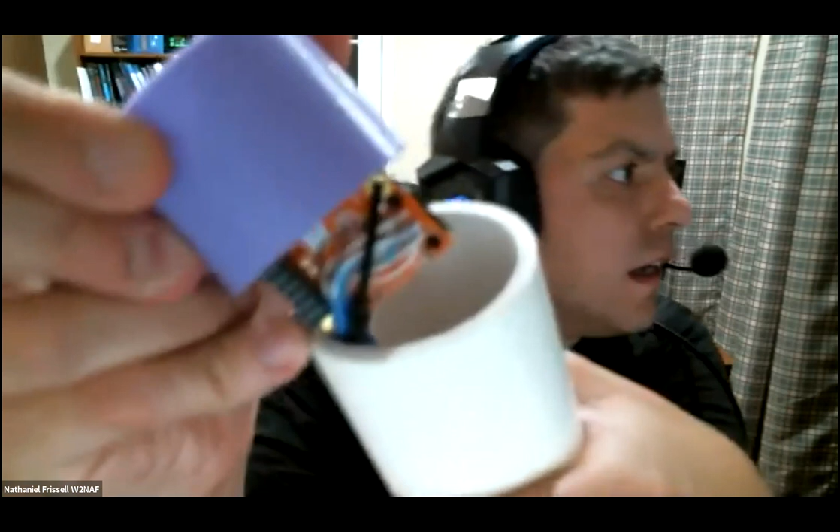So we're not using the Ethernet or RJ45 connector there, since it's not actually Ethernet. And then when we put the RJ45 connectors on there, we should use shielded connectors. Is that right? Correct, correct. Okay, yes. And what you might want to consider, Nathaniel, is not putting that down at the very bottom of the pipe. Keep it up a couple inches.

That gives you some tolerance of some water intrusion before it fries the board. Okay, yeah, although I have not had a problem with water with either of my sets for over 2 years now, or a year and a half at any rate. And if you seal it well with RTV, you'll be fine.

Okay, what was that about shielded connectors? Pardon me? What was that about shielded connectors? The bulkhead connector is female to female shielded. Oh, okay, so it carries the shield all the way through to the board. And I noticed that he also used a strain relief on that after they soldered the wires. There's a tie wrap as a strain relief at the bottom of the board, which is good. Yeah, oh, down at the other - we're going to have to, as long as the shields are well away from the magnetometer, because yep, shielded Ethernet connectors are magnetic.

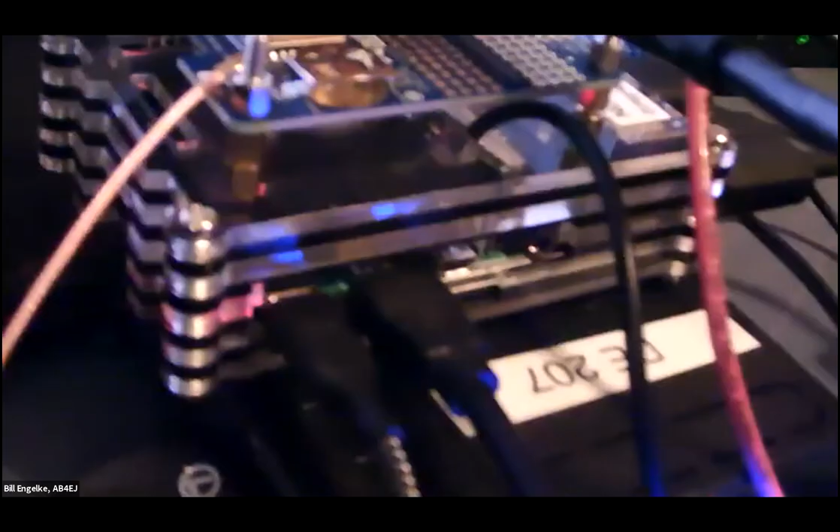All right, I'm showing my screen. You can see the bottom is the grape as it came from John, and then I've got one riser that comes up out of the grape, and plugged into that is the GPS unit I use for getting location and timing information, and on top of that is a magnetometer board.

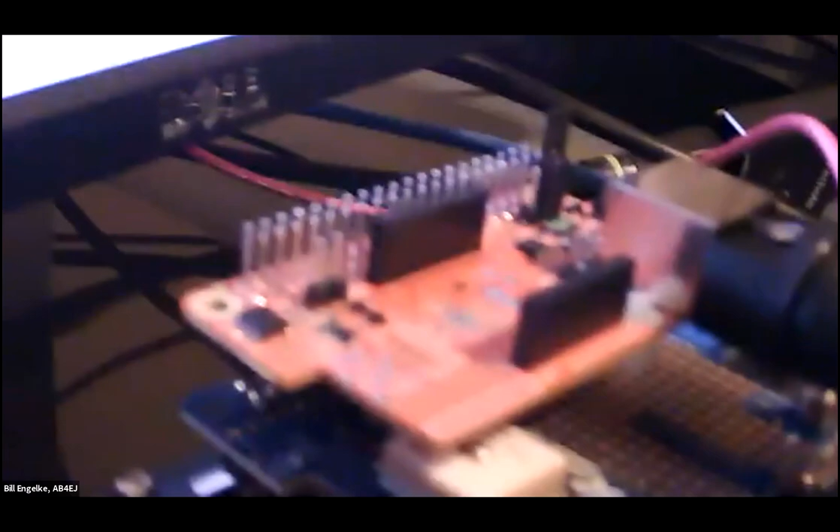Did you need a spacer to do that? No, not really. It's not ideal to have a PC board over the GPS antenna. Well, the antenna is outside - see that cable there? Okay, well you've got an antenna on there, but you're not using it, I take it. Yeah, usually that disables when you put on an external antenna. That makes more sense. I wouldn't be able to pick up a signal - I'm in the basement here. I have to have an external antenna to be able to get a GPS signal. So I just saw the antenna.

So the base unit that you call the grape is actually a Raspberry Pi and the grape and the power supply, right? Yeah, well, there's a Raspberry Pi, and this is, I guess, what you would call the grape. It's the Leo Bodnar and the little board that was built by John.

Right, but that's all in a stack, and then that goes to a USB extender so that I have everything - you've got to plug in your mouse and keyboard and your external hard drive, and there's no clearance to do that unless you use an external USB extender box to go into.

Okay, but stop right there - that stack you're showing right now, up to the upper left there, that stack. There's a stack of boards underneath your GPS, right? What is that? That's kind of deceptive, what that is. That's just the way the box, the chassis, or rather the case that came from Case Western Reserve is. It looks like a stack, but it's just a case.

And what's in it, just the Raspberry Pi? The Raspberry Pi, and I put an extender in to bring the GPIO out of the case. So you have the Raspberry Pi inside the case, an extender that extends it outside the case, and on top of that the grape board? Well no, the grape board is down here, it's separate. Okay, so on top of that you put the GPS, and then on top of that the magnetometer base. Yes, everything works like a champ, worked first time, no problems at all.

But when we get a Grape 2, isn't it going to go between the Raspberry Pi and the GPS unit? I'm not familiar with the Grape 2 design, but if it's going to plug into the GPIO header of the Raspberry Pi, I guess it would go in between. Yeah, that's what I think John has the intent for it to do. So it would still work the same way, you just have an extra board in your stack. Right, you can stack them up as high as you want, I guess.

Hey Bill, it looks like that extender - is that a homebrew extender board with a vector board? The board below the Pi looks like vector board and perf board. Oh well, it's just the lighting isn't very good here. It's just an extender unit that I bought from Digikey or Mouser or somewhere. Okay, it looked like it was made of perf board, the vector perf board. No, it's probably because I don't have very good lighting, it's very hard to see this.

And I've got some other things bolted down to the desk here, I can't move it back. But no, between the Raspberry Pi and the GPS is just one of those 40-pin extenders. Oh okay, a long pin header you mean? Yeah, I guess that's what you would call it.

So what is the thing that looks like perf board? Is that the board the GPS mounts on? Yeah, the perf board-looking thing is the GPS board. It's an Adafruit GPS, I don't know, $40 or something, and it gives you GPS. Okay, and that has the holes that look like perf board on the right hand side. Oh yeah, that's just part of it, it's the way it comes from Adafruit. Okay, so that's a prototyping section - you can add more stuff to it if you wish. Yeah, all right, got it.

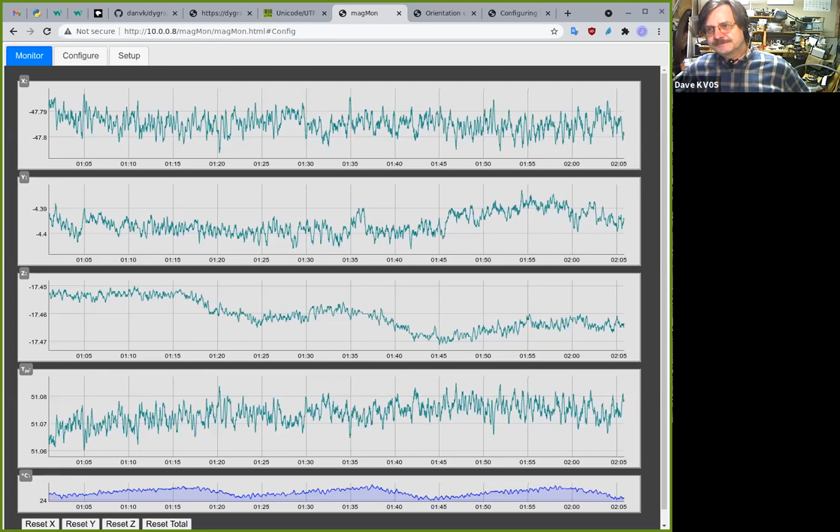Can you see that? Yes. Okay, well that is actually running, should be live. I see it move. And you can pan in.

I haven't really got it full pan. This at the bottom is temperature. It's actually X, Y, Z, and the totalized thing. And this is all running from a unit that's sitting on the desk across the room, and that bears absolutely no relationship to the real magnetic fields around here.

But you're reading it off of a real board, right? It's just that it's inside. And this also at the same time is able to push logs to the archive up on the server, it saves, but it also, this is actually a WebSockets interface that's served up by the device. It just serves up the page, and then it communicates by WebSockets.

So this data gets plotted, but it can be anywhere. The way it's set up right now, anywhere on my local net, on the subnet that I use behind my firewall. You could push it out beyond, but I would suggest that people don't.

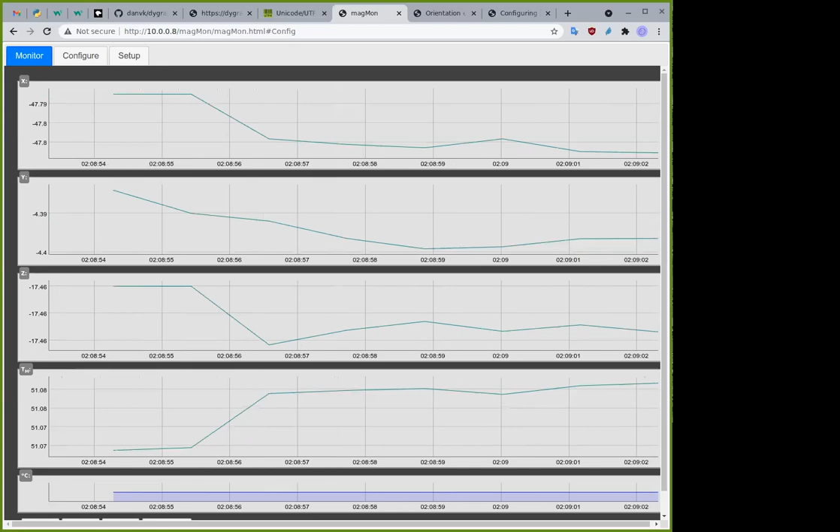I can actually refresh the whole thing, and you should be able to see it pulling in. I haven't figured out exactly the presentation here, but you have control over the time period that it displays. Is it from the beginning? Yes, I do. Well, this itself doesn't record anything.

So it's really from the moment you reset it. But there are a lot of questions I've had. I've been thinking about what this doesn't read, the logs or log data or anything. And I'm concerned how much I want to pump into this interface. I don't know, as usual with web stuff, you don't always know what's going on inside the black boxes.

Yes, it is. It'd be nice if you could just tell it to display the last hour, display the last day or something. And when you restart it, it would just start from the right-hand edge and fill in. I plan to do that.

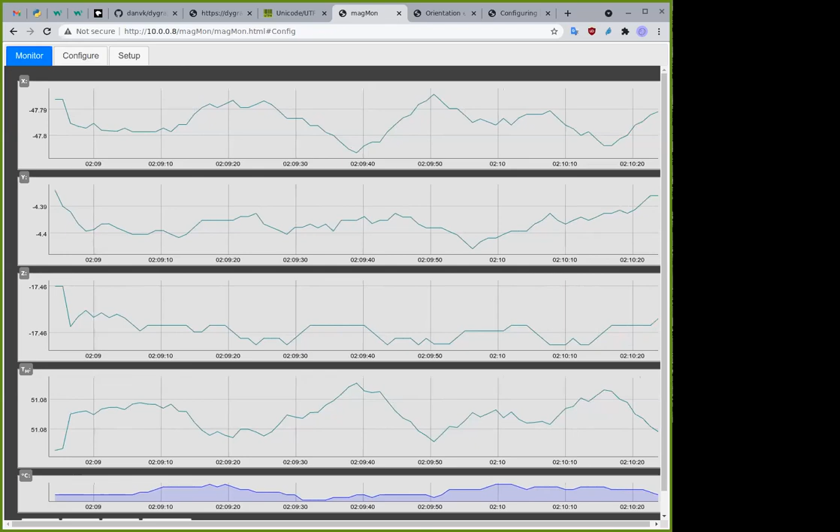Okay, the question is, should it automatically restart? If someone leaves it running, should it automatically restart at 00 UTC, or should it try to keep going? I was thinking maybe show the last hour or two but give it the ability to pan back and forth through, say, 12 hours or something like that.

Well, ultimately, we need to be able to keep track of days too, because a geomagnetic storm's going to be more than just an hour. Yeah, but all that data is being written to the log files for post-processing purposes. This is not intended to do that kind of thing. It's mostly to show what's going on right now and is my thing working.

And in fact, it's supposed to change color if you lose your link. But I may have clobbered that somehow. The background's supposed to turn pink or something.

It seems pretty reliable. I've run it for a day and a half at max, but there are lots of things to tweak about it right now. Yeah, I just wanted to show that, but I just wouldn't have it auto scaling with time scale.

Yeah, it's taken me a while - the terminology of these, it's kind of like financial terminology on this particular, these time series graphs, and so I've kind of had to figure out what they mean by what they're saying in terms that I know. That's something about where the code came from. Yeah, this should be smooth with a 10 sample moving average. They call it 'roll' something, but it took me a little bit to figure out what they were talking about.

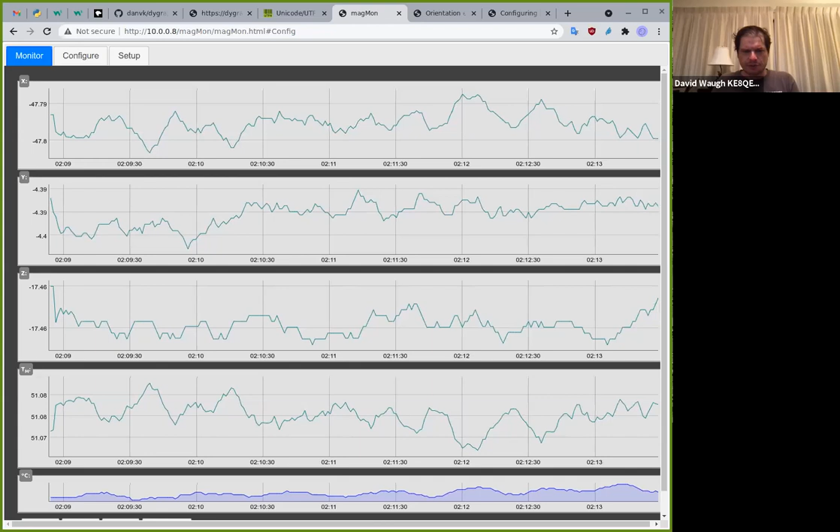Well, Dave, this is more of like, you know, if you want to see what's happening immediately for testing or alignment or other purposes, because as you point out, the log file is being created, and so you can. Yeah, but the whole point is to be able to see it. Log file doesn't do me any good - it does the researcher some good, but it doesn't do me any good to see what's actually going on.

Yeah, well, different people are going to have different things, and that's really part of why I wanted to show it to folks at this point, is to see what y'all - yeah, but how hard is it to set it to a fixed time base? A fixed time scale, instead of having the scale constantly changing, which is just probably driving my eye nuts. Well, probably not hard at all.

Okay, but yeah, just even having it as a running - well, strip chart, but not changing the time scale. Have a constant time scale, and you know what I'm used to with strip charts is that you can tell it what time scale you want, and then it just streams across it and gives you that rate.

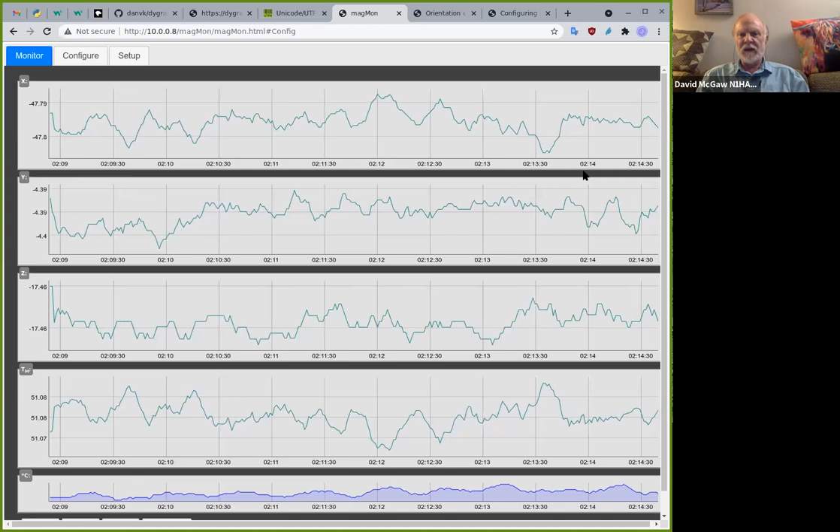Yeah, I believe it can do that. It's just that it was not obvious from the very beginning what the settings were to make it behave that way. But it had so many other, as I worked with it, useful features.

Unfortunately, the website has got good documentation, but somebody hasn't been keeping up the website very much. So a lot of the links to examples - you have to go out and run them from the GitHub code and things. They don't work from the website, and it's just the usual bit rot that goes on.

Yeah, well, this is just where I've gotten to with it in about a week and a half of messing around. And to me, the really important thing is that it's using an intermediary - it's actually currently using an intermediary WebSocket server. There's a little web server also.

Supposedly, the web server I was using could be the WebSocket server also, but I couldn't find any documentation how to do that either, except a little bit in the Lua, which didn't seem to be the way I wanted to do it. And so I did this.

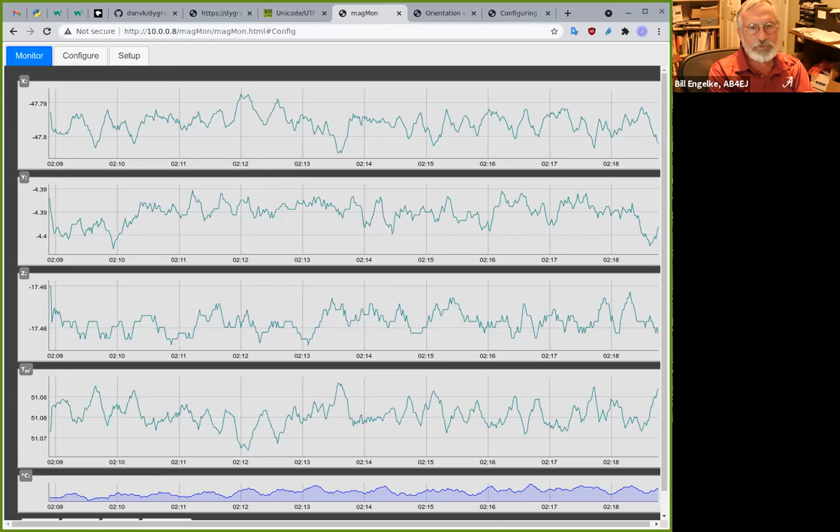Well, Dave, I really like this. It looks like something that would be cool to show on a local host as a strip chart. You can do it on the local host, but to me the really nice thing is that you can run it on the local host, but if you don't want to put a display on the local host, you just want it on some other machine somewhere else, it works just as well remotely.

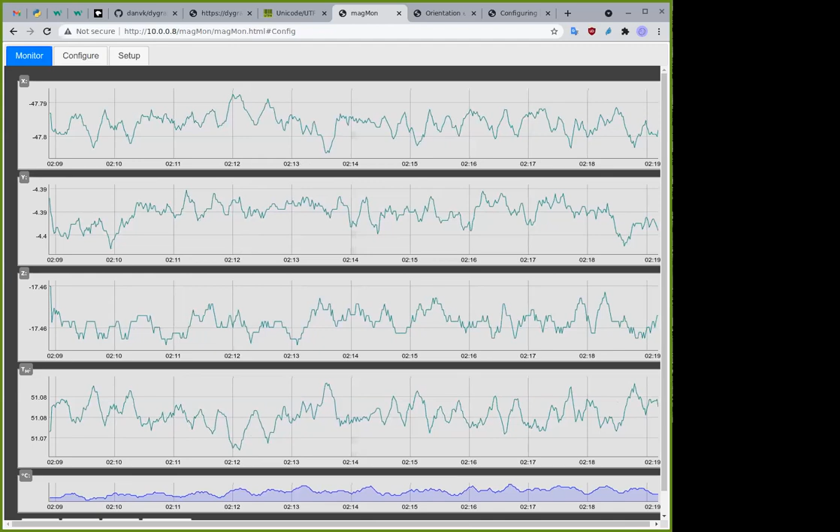Yeah, and that was my goal in writing it this way. And it's really not very different code than what you're already playing with. So yeah, I really like it.

I mean, because the local host uses a web interface, when you have your local host running, you can control it from another computer somewhere else. Oh, okay, and you can do that with this too. Sure. Oh, okay, I see what you mean, the interface you have on the local host at this point. It is web-based, yeah. I see.

Well, this is a very lightweight way to do it, at least in terms of the amount of load that's added to the local host. So this will end up on GitHub for any and all who have interest in it.

This particular code, I presume, is auto scaling the vertical, so that if you get some wide excursions, they will bring down the scale rather than clip. Yes, I set it to that to begin with. Yes, it auto scales in the vertical. Initially it wasn't doing that, and I was getting funny results.

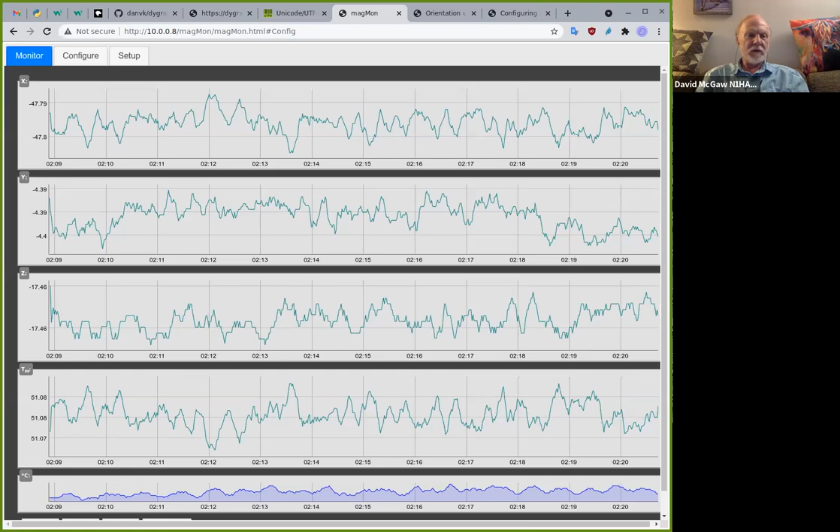How hard is it to tweak the scale parameters in this code? Well, it's just in the JavaScript. It seems to be incredibly flexible. And the only trouble is it seems to be a fairly tight club of people who've used it.

It actually can be used directly from R. It has an R interface, and from Python, I believe, more directly, rather than having to do something like WX Python or something that encapsulates a web browser.

So, again, what's the package that you're using? The graph is called dygraphs. Here, I don't know if you can see. Yes. Do you see my... Yes. Dan VK dygraphs? I happen to have it open.

It's interesting, it's just been kind of lying fallow for four or five years, but I think it's actively used by somebody for something. But it's really more for financial. Actually, some of their things are temperature, but at first I thought it would only do two traces, but that turns out not to be true at all. There's some much more complex examples that I don't entirely understand.

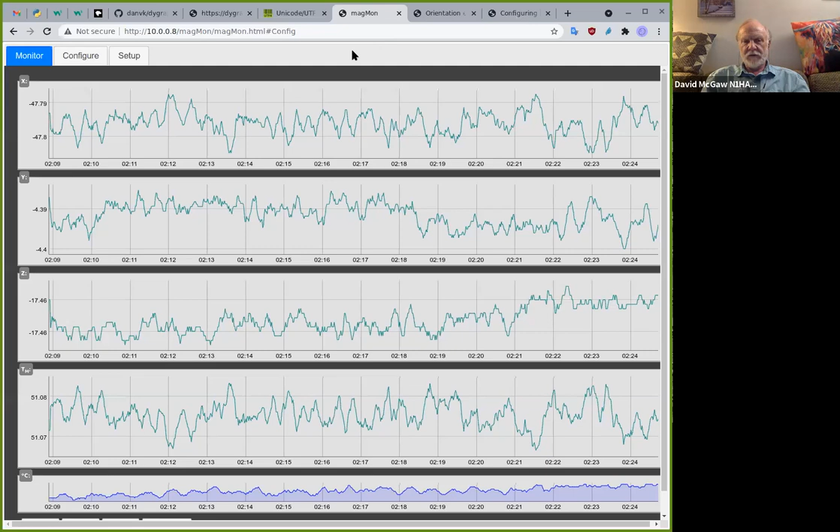But I'm actually using, what did I do, something called gwsocket, which is a C program that seemed to be well tested. They had run it through a lot of fuzzing and stuff like that, and I thought that was good. I wasn't sure, even if you're displaying it locally, you have to go through the web. You have to be connected to the web.

Well, I haven't tried it, but no, you don't have to be connected, you just have to be connected to the local. You'd be running just a local socket. I'm pretty sure you can essentially open a localhost socket. The data is just coming through pipes to this WebSocket, and then the WebSocket...

WebSockets have some headers and things, it's one of those enhanced protocols, kind of an extension to sockets to make it work well in this kind of environment. This intermediate piece I'm using right now just converts from the piped JSON objects coming out of RunMag and pushes them into this. Any way you can get that to happen would work, but I believe this would work just fine locally as far as I know. I'll have to try it, but I haven't hooked it up to my outdoor magnetometer, and it looks like the guy with the lawnmower may have caused me some grief on that account. So anyway, that's what I've been playing with.

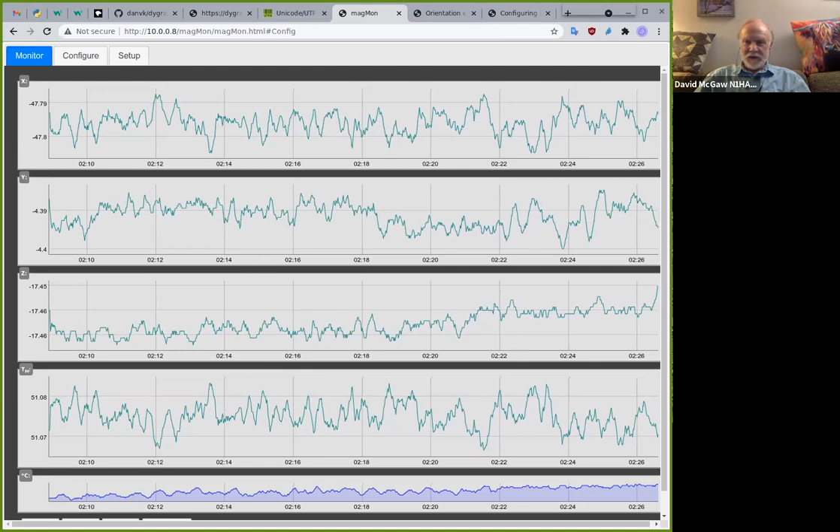In Greenland, it wasn't lawnmowers, it was snowmobiles. Yeah, I doubt there's anywhere on Earth you can go that doesn't have something that's going to chop it.

I think that all looks very encouraging, Dave. I like it a lot.

Now, I asked a question earlier and I don't think there was an answer. Is there a way to get actual RF data into the Max 10 evaluation board? Not right now, we're talking about building an adapter for our RF module. Although I do have some spare boards floating around if I can find them.

I think Dave's left, but Dave has one of them. It's an AD1, which plugs onto an HSMC connector, which that board has. And it converts it to an MEC connector, which allows you to run an HF1 or HF2 receiver board that we sold previously. So yeah, there is a way to get some RF in. The HF2 board is probably the best bet since it uses a 122.88 megahertz oscillator. But they're a product that we sell, and they're expensive.

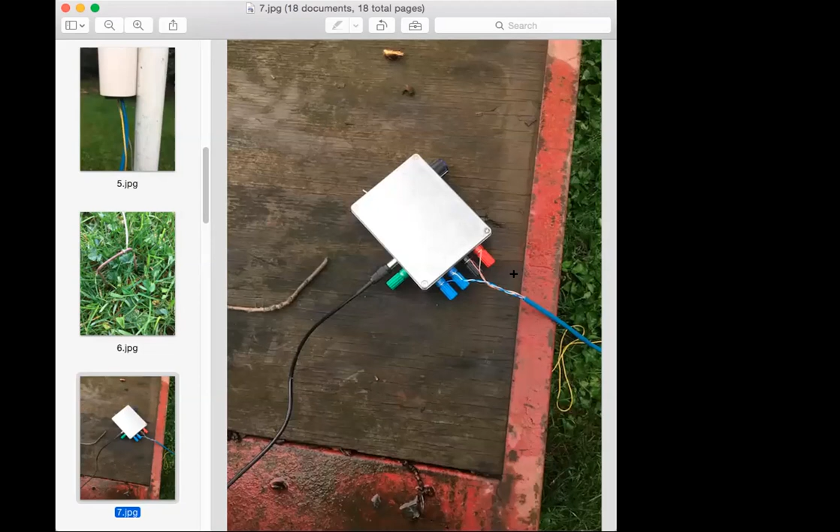This is my test box. You can see power and audio. There's the volume control here, the toggle switch, and it's currently routing the audio signal through this RCA jack. That was plugged into my phone, and I was able to get the live spectrogram. This is another view of the top cap.

So this is the foam core. There are two foam cores: one is the long antenna core, and this is a smaller core, because with that long antenna core and all the friction with the copper tape, trying to push it in, this foam was crushing, so it didn't really work all that well.

So I thought, well, I'll just make a separate core so I could pull this out, because if anything happens to this, I'm going to have to get to it to repair it. So I made this a little short foam core. There's actually double-sided tape on the bottom of this board, and it's held in place really nicely.

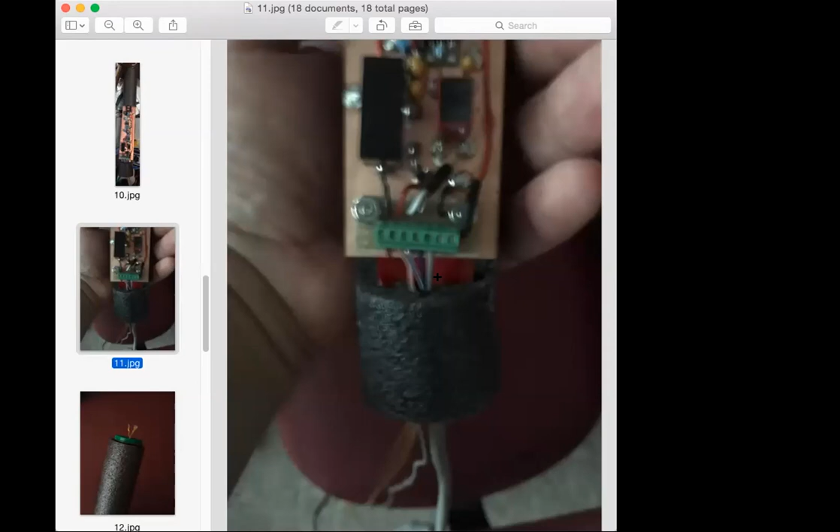This is a close-up of the connector: 2 for audio, 2 for power, and 1 for earth ground. There's actually 2 more for a calibration transformer, but I never utilized that yet.

This is the button I was talking about. It was just a cap from a gallon jug. I put the string through and used double-sided tape to attach it, and it works really well.

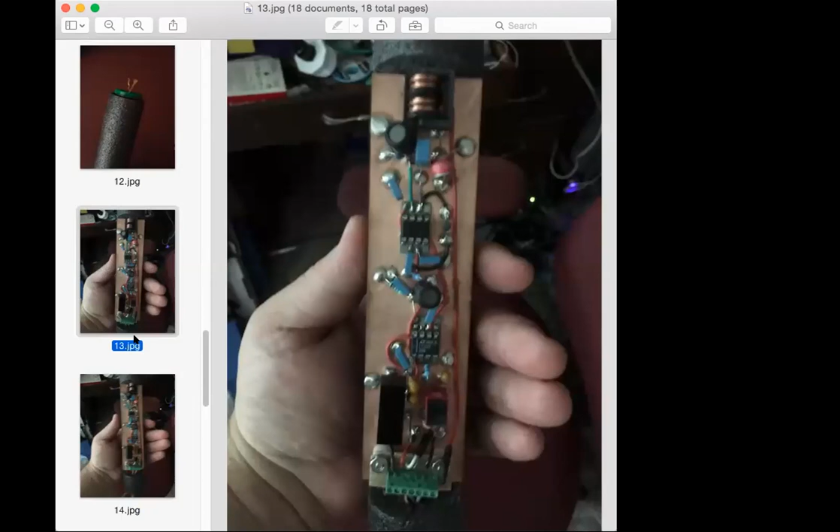Yeah, this is a better view of it. Here's a better view of the cap. This was originally on the antenna core, but I took it off.